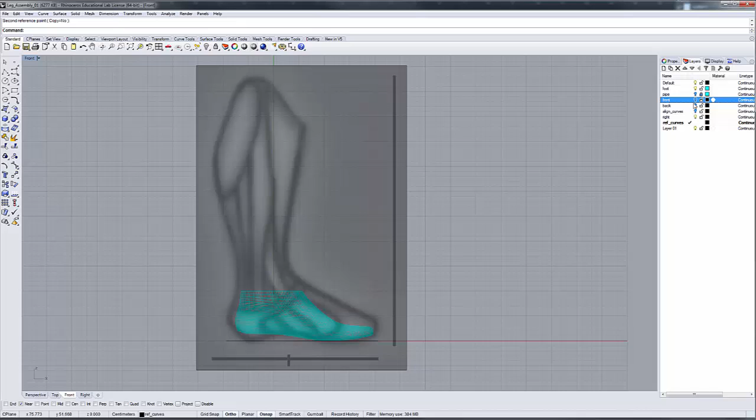For our prosthetic device, I'm going to bring back the pipe just so you can see how it relates to our object. For now, I'm going to turn off the foot because I don't really need it for the work I'm going to do in this part of the tutorial, so I can concentrate on this.

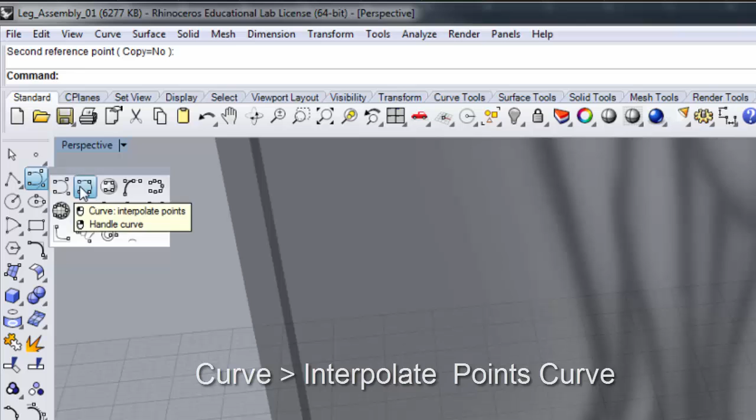So I'm going to go to my perspective window, and make sure my near snap is turned on. I'm going to use my interpolate points curve right here with near snap turned on, and start my line at the origin. I like to use my reference line when doing this work. Now I'm going to go to the front view and turn off my ortho snap so I can draw more freely.

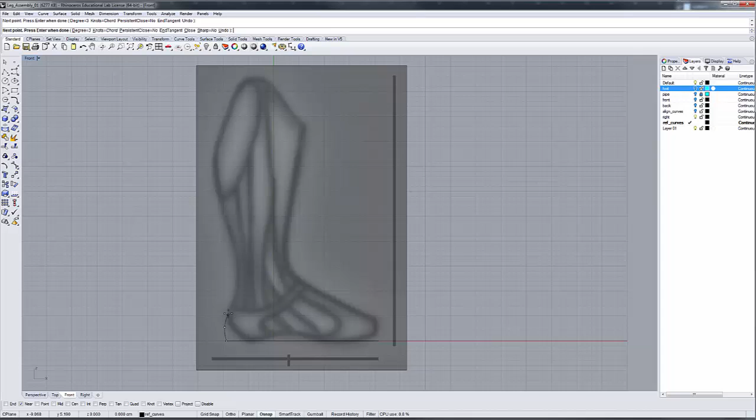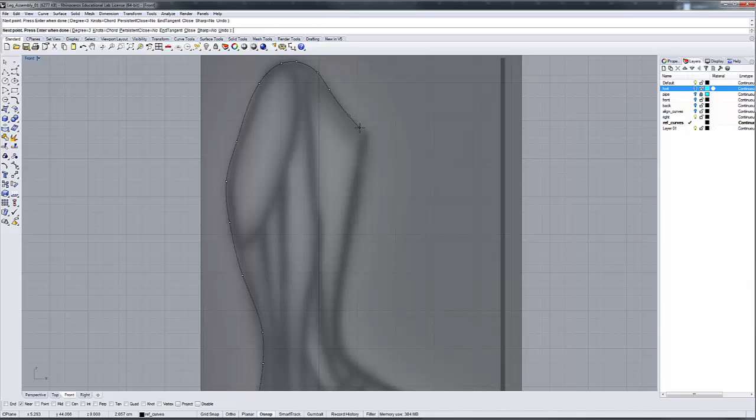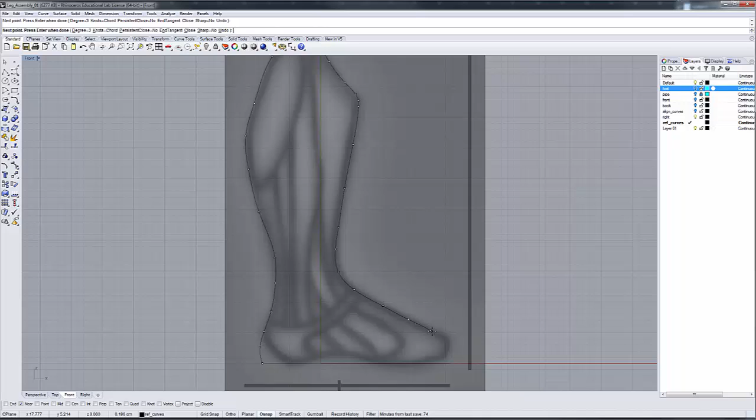So I'm going to do one here, one there, and you'll notice that now I can move through that corner efficiently. I'm going to continue to draw here, like so. That's why I drew my lines really bold, so I could get the essence of the curve I was trying to capture here.

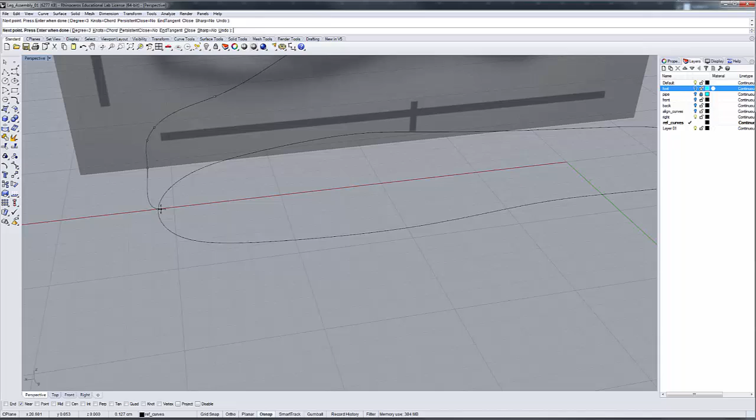I'm going to bring this down. I'm not going to try to capture that curve down there, and I'm going to go back to my perspective view, and align that point right along the origin, like so. That gives me my boot in that profile, like so.

I'm going to turn off my right reference and turn on my front reference, go into this window here, and go back to my perspective window and capture the point. I'm going to use the origin again, where I want to begin drawing that profile.

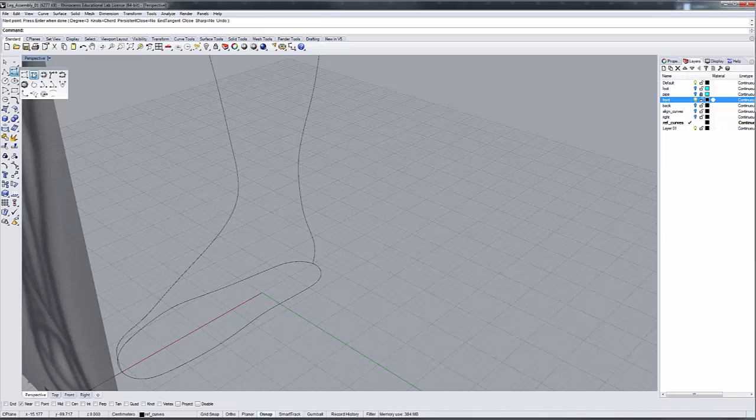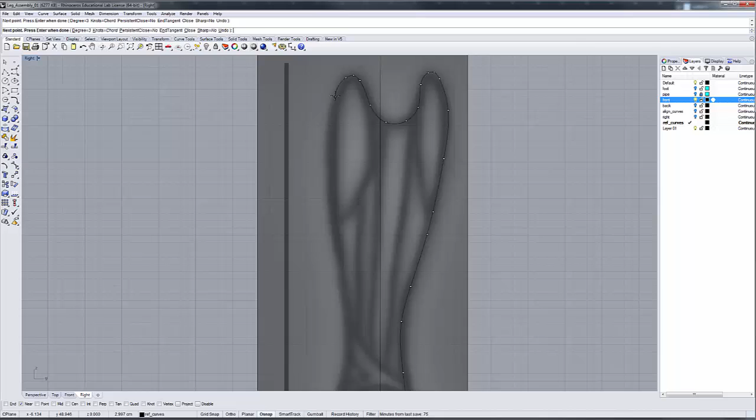I'm going to use the interpolate points tool, go back to my reference right here, and go straight up here like that, following this reference. I'm going to use only the points that are necessary to capture the essence of my curve. These are all going to be refined later, and I'll show you how you can refine them to fine tune them to get them just the way you want.

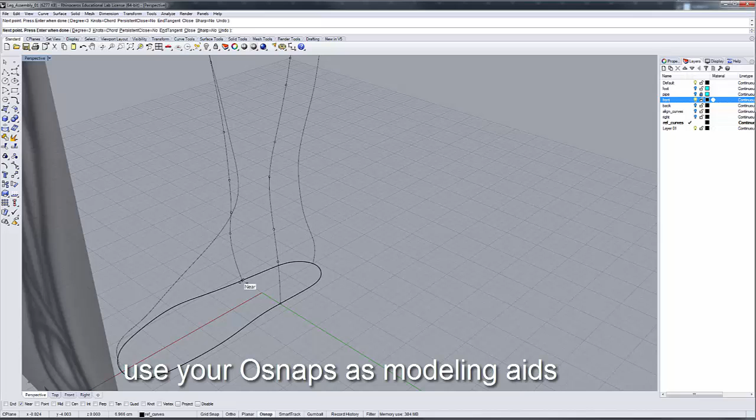Now I'm going to go back to my perspective window and use my near snap — that's why your Osnaps are so important. I'm going to add a curve point right there, and now I have that point there.

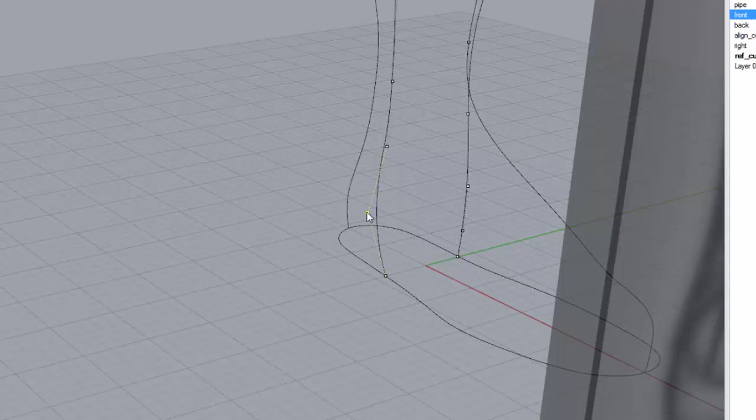But as I look at this and turn my points on, I have a couple extra points here, and I want to get that kink out of that ankle, because I don't want a cankle in my model. I'm going to get rid of that one — that's a lot more subtle there. I could also get rid of this one, but that's too straight, so I'm going to bring that back.

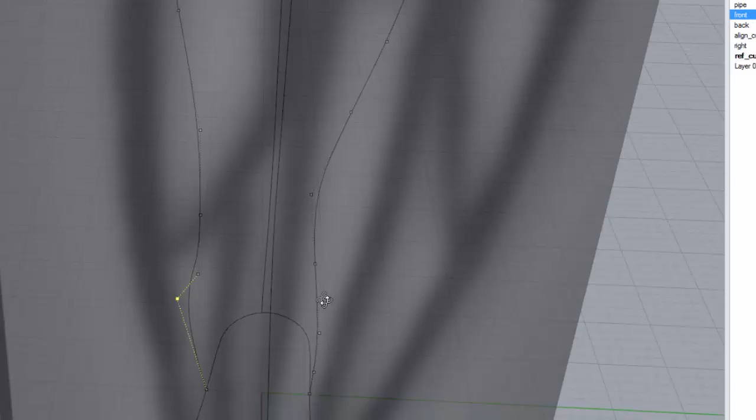If you hit your control key, that puts you in elevator mode, so you can use that to adjust that curve, because it constrains you to moving vertically, which is what I want. That gives me an indication of the outside of that ankle.

If I go into my right side here with ortho snap turned on, I can come in and move this in like that to soften that profile like that. And that gives me my vertical profile curves.

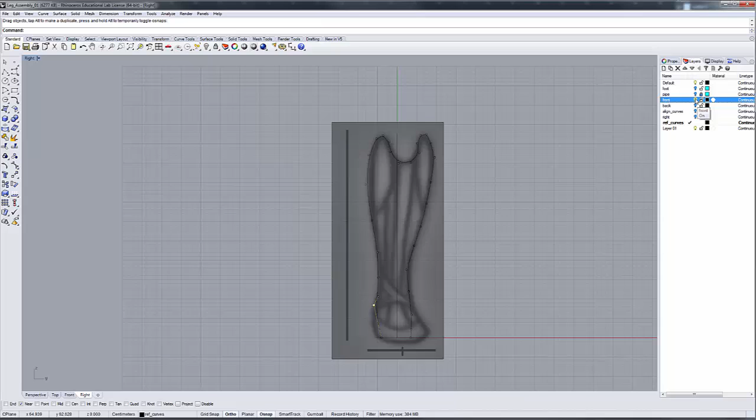With that done, I can turn off my reference image right here, and go into my perspective window. As you get more comfortable modeling in Rhino, you can begin to do more of your work in the perspective window. What I want to begin to do is draw some of my horizontal reference curves, starting with the ones at the top.

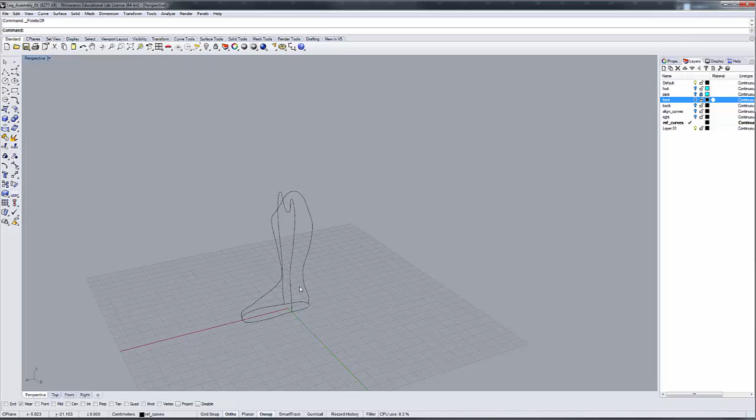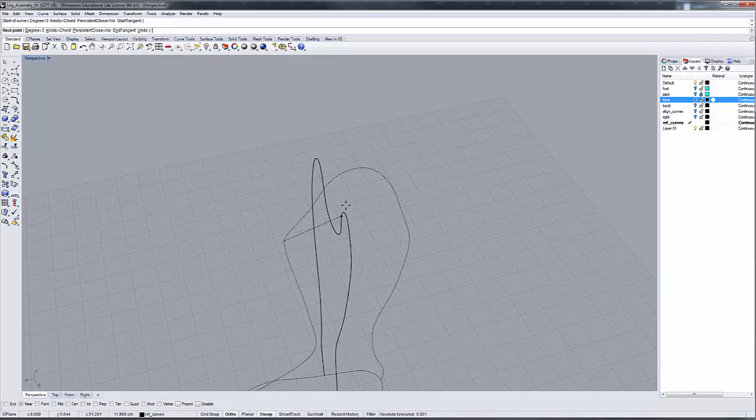This is where your near snap and interpolate points tool come in really handy, because they allow you to work in a three-dimensional environment. So I'm going to click here for my next point — let's turn off that ortho snap.

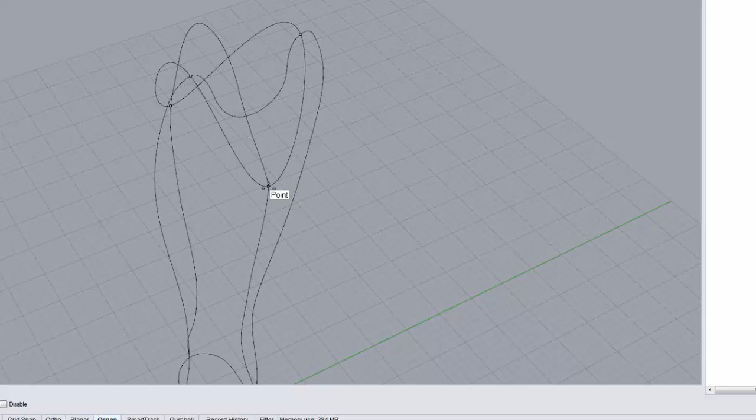I want to be in the center here at the peak, and I'm going to bring this one down right here to there, come around here, capture the point in the center, and then come back to this point, which gives me a nice curve reference there. I know I have a shift area here.

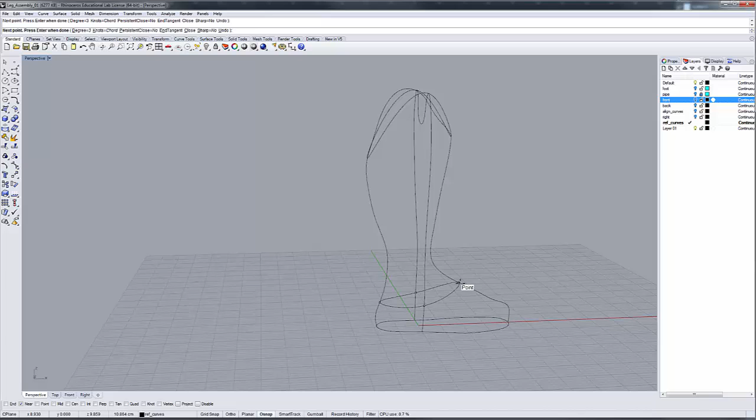So what I can do is right click to execute that command again, come in here, right there, bring that point through the ankle, come around to the other side like so, and I've indicated the ankle there. I have this transition here, capture that, come around here like so, and you notice I get a really nice smooth curve when I do that.

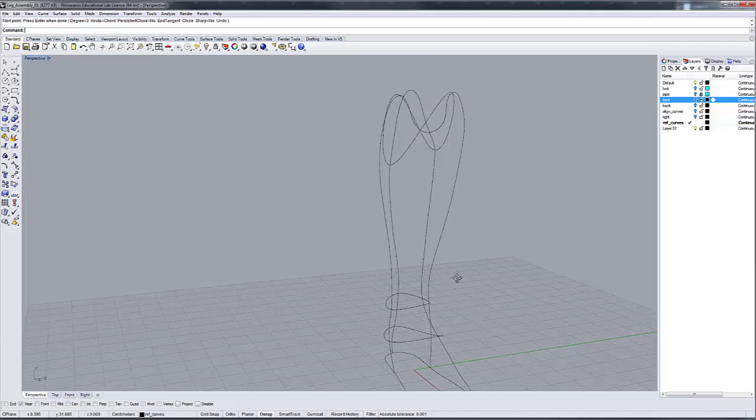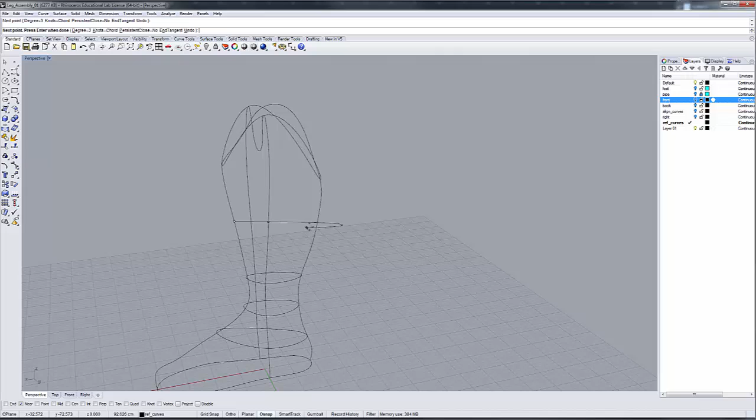Now I can come over here and add another one here, and there. The transition here is not so gross, so I don't need as many points there. But we're going to go here, I'm going to go there, and we're going to go here like that.

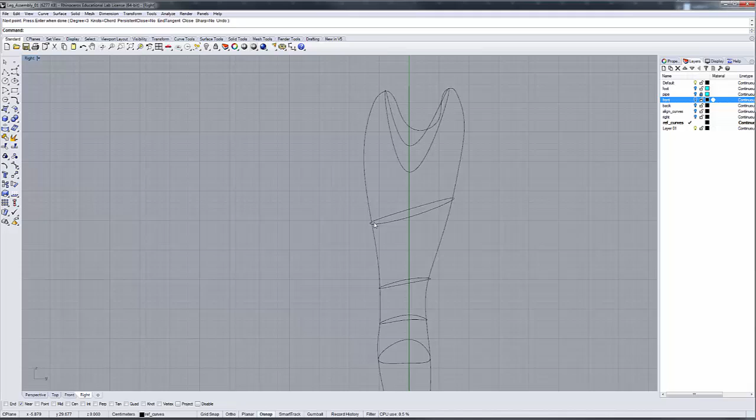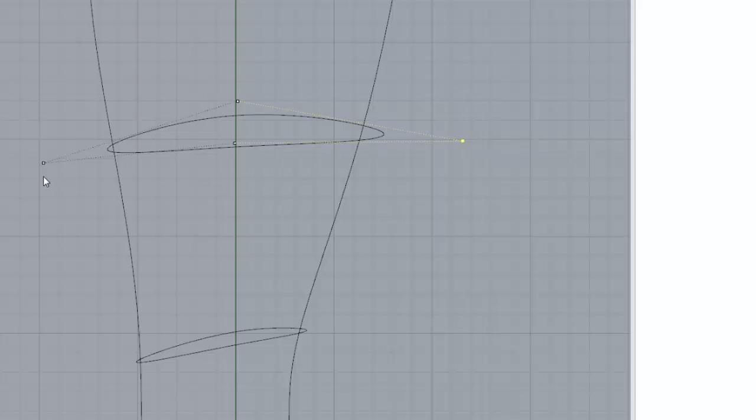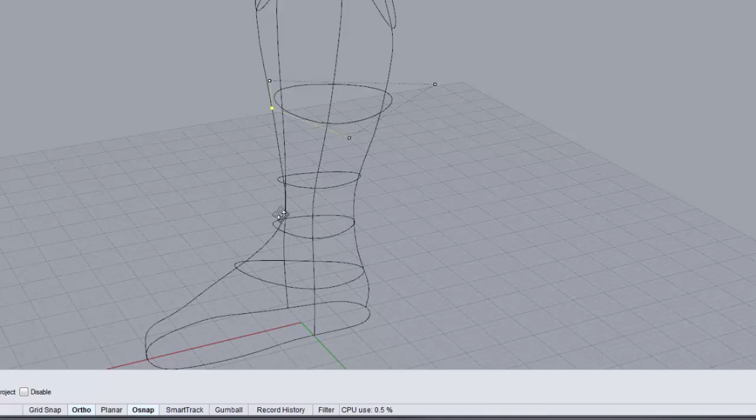Now, if I want to clean these curves up, I can go to my right side, look at this, and turn my points on. I can take these curves right here and move these down, like so, and like so, to bring these all to the same level, and to clean that up a little bit. Those are my base curves there.

Okay, I'm going to stop this right now. In the next tutorial, we're going to build the network surface that's associated with these curves.